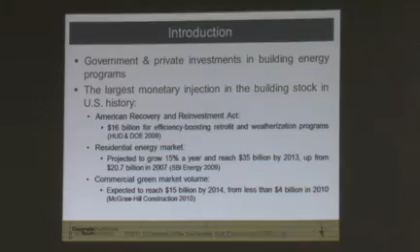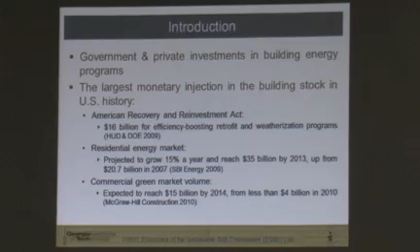Here is an overview, and let me get to the bottom of it. Everybody in the construction industry, in architecture, engineering, construction, talks about sustainability and a huge amount of investment from the public sector and private sector into sustainability, renewable energy, and things of that kind that help us save energy, produce energy on site, and it's large, it's huge. If you put some dollar values, you can see it's huge and it's rising.

It's already up there. And the major problem from the practical side is this valuation is not addressed correctly. Most of our valuation techniques are based on return on investment, payback period, or net present value, which really don't capture some of the fundamental features of these investments. And I'm getting to that. And one of the most important limitations here is most of them assume that you have a fixed business strategy, fixed investment, and you have to value that fixed investment. In other words, that you have a fixed design, fixed strategy for design and construction, which cannot be changed, or you cannot incorporate it in multiple phases.

And the reality is not like that. Usually this investment happens over time in multiple stages, and we can capture several investment strategies that are flexible, can incorporate some flexible design technologies to enhance the value of investment, to minimize exposure to financial risk. And what I'm proposing here is a new valuation method to overcome the limitation of current valuation techniques.

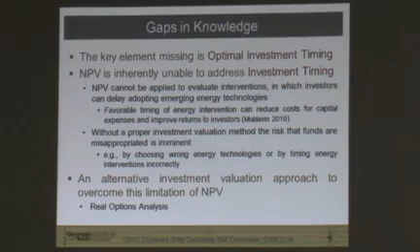So the gap is that investment timing. Currently, that investment timing is not part of the equation. So it's not just investing today or never. It's about when would be the optimal time to invest, and what would be the investor risk profile under all sorts of uncertainty, considering that optimal time for investment.

So basically, I'm proposing, instead of using conventional methods like net present value, the basic engineering economy that some of you might be familiar with, using option theory, because these are really options for investment. You can exercise it as an owner, as a property manager. You can exercise it at any point in the life cycle of a building. It's not just immediate investment. And you're looking for enhancing the monetary value and minimizing the risk profile of that investor over the life cycle of the building.

Let me talk a little bit about the flexibility, and here is something that I would like to hear back from you in the Q&A section. I would like to see a good example, a good flexible design strategy, not just for sustainability. It could be flexible workspace, it could be a flexible AC system. The thing is, what can this flexibility bring to the table?

And the example I have here is solar ready. I mean solar technologies, photovoltaic panels. In the past decade, the price dramatically dropped. But many homes, many buildings cannot use that because it requires some additional costs. It's not just purchasing those panels. It requires wiring. If you want to use it for heating water, you need to do some piping, and you need to have additional structural support to put the PV panels up on the roof.

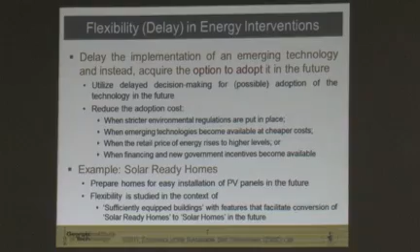So that's kind of challenging the conventional wisdom in terms of fixed design. So we'd like to have flexible design in order to help us achieve sustainability in the future at lower cost and higher expected value in terms of monetary value and benefits for the owner. There are a lot of barriers for energy efficiency and renewable energy. I listed 20 factors here.

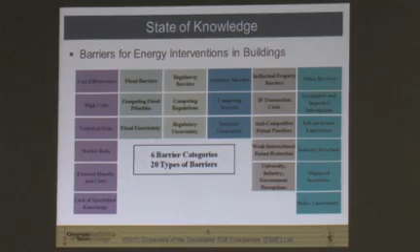What I'm mainly focused on here is cost effectiveness and the fiscal barrier. What I'm saying is, at the end of the day, for whatever value system you have, it should make economic sense, and how we can make a business case for sustainability. And what I'm arguing is that flexible technologies like solar ready can help the owner achieve a higher level of investment value.

Again, this is an overview of conventional metrics like ROI and payback period, and the limitation is they don't consider timing. And that timing sometimes ends up in overinvestment, sometimes underinvestment. So that timing is really key. If we want to achieve certain environmental goals in terms of energy reduction, we need to not waste capital. That capital is limited. A smart investment helps us achieve better utilization of the existing, limited capital.

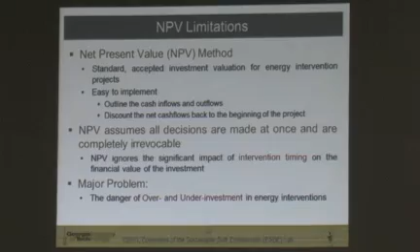Real options can consider investment under uncertainty and also consider timing as part of that. That's what I'm going to use and apply to the problem at hand. Here is an overview of the research method. For any economic analysis, we need to have some sort of life cycle cost and benefit analysis. So we need to have some idea about what would happen on the energy saving side, in this case renewable energy production coming from the photovoltaic panels, and what would happen to the installation cost, the initial cost.

The initial cost tends to drop rapidly. It kind of follows the experience curve. For most technologies, it's covered by the learning by doing effect and economies of scale. So we have that declining cost. But on the other hand, we have so much uncertainty about the actual performance of these emerging technologies, in this case the solar PV panels. And by the way, they degrade over time, so their efficiency decreases over time, and we have some uncertainty in that regard as well.

On the other hand, the utility market is volatile. It's very volatile because of the energy market in general. If you look at the price of oil and other sectors of energy, you see that volatility somehow translates into the electricity market that we all use at homes and businesses. So that volatility is part of the investment.

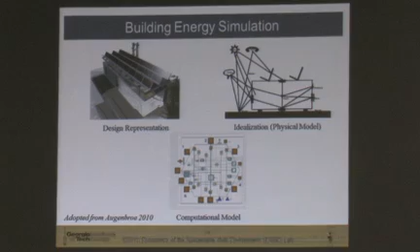We have good methods and good models now that can help us quantify uncertainty about energy savings. We can run uncertainty quantification on building energy simulation. So we have some ideas about how the energy saving looks like over the life cycle of a building. That's important because it helps us say, if I adopt it today, how much am I getting in terms of energy saving, and how does my energy saving profile change over time. This is something we can benefit from.

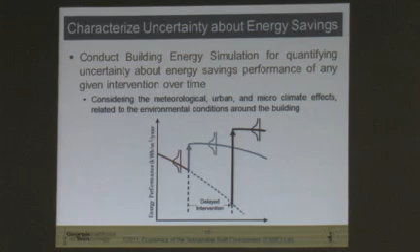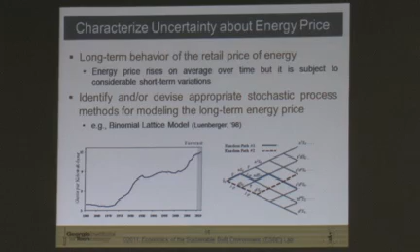In our framework, we use that as one component. On the other hand, we need some sort of stochastic model, some sort of uncertainty quantification over time to capture the monetary value of that energy saving - what utility companies would pay you, or what you have to pay them to get that amount of energy. So the combination of the two gives me the energy saving benefits of any technology, in this case, renewable energy.

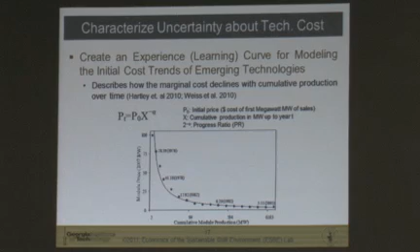But there is still uncertainty about how much they actually perform in actual settings in different climates. So that should be taken into consideration. With the building energy simulation domain, we can capture that as well. Then we run that trade-off analysis.

While you are waiting to adopt the technology, you're losing money - that's the opportunity cost right there. So the trade-off is accumulated energy saving that you're not getting by adopting early, versus installation cost that drops over time. At some point these two cross out, and that gives you immediate decision rules for investment. It might be that today, for many technologies, things are mature and there's less uncertainty about their performance, so you have to adopt it today. Otherwise, the opportunity cost is high.

You're losing money by delaying your investment in energy efficiency. For some other technologies, you would still like to observe the market - not just the PV market, but the energy market and regulatory changes that impact energy price. So you will still like to observe what happened in the market and delay your investment, but you need to be equipped for that.

Like for instance, for solar ready, as you do your stuff, you have your structural system supported and additional support for putting PV on the roof. You also have wiring done in your attic if it's your home. Because these are going to be huge costs.

On average, if you want to turn your home solar ready when it wasn't designed that way, that costs you around 15 to 20,000. But with some consideration in early design, early construction, it might cost you maybe less than 1,000 to do extra wiring, extra pipe in the attic, and put some sort of structural support for PV. That gives you a lot of savings and a lot of incentive to adopt these emerging technologies in the future - it might be down the road 10, 15 years.

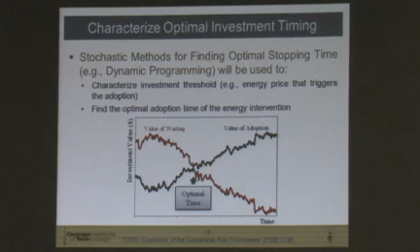What I'd like to say is we need to have some of these flexible design strategies as part of the building design mentality. It's not for today, it's for use over the life cycle of that building, that home. And with that consideration, I have one example. I welcome other opportunities, other technologies that you think would have benefit and are still emerging, but in the future we can adopt and incorporate into a flexible design strategy.

Then we're going to compare these two - basically compare what is fixed, going today, versus delaying that to find optimal and favorable timing. You see a difference between the investor's risk profile. In other words, you minimize exposure to negative outcomes because you delay investment - if the situation becomes unfavorable, you don't have to invest - versus the case that is fixed, where you have to go in today.

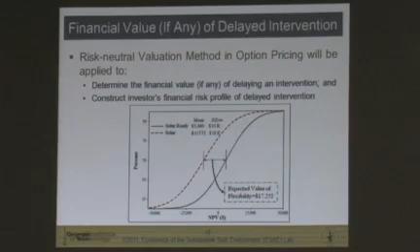We had an example of a solar-ready house, and we compared it with the actual solar house. It's kind of a California example. These are the overview of that case.

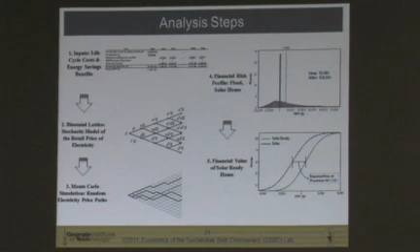We built that electricity profile model. We built that energy saving calculation in terms of some uncertainty about the actual performance of these PV panels over time. So we get to an optimal threshold for investment.

In this case, we consider one variable. If you look at the electricity price over a period of 20 years, you see this threshold for investment. That means investors would find this area waiting more favorable. Why? Because it's early, things are emerging, and there's a value for waiting. The opportunity cost is not huge, so you wait.

But at some point it flattens out, meaning this is the time. It also considers not losing money, the energy saving benefits you would get if you implement that correctly at an appropriate time.

So as you can see, in most cases, if you look across the nation at electricity utility rates from retailers, most of them are here. They're still waiting to see what would happen. And if you look at places that already adopted, they're talking about this kind of utility rates.

Out west, if you check the utility rates in California and compare them to Georgia, you'd see why it's not making economic sense here. So I'm explaining the motivation when I started this, why certain technology adopted faster in Europe, California, out west, and the northeast compared to the south, Texas, or other areas.

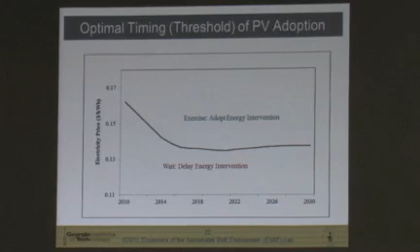Owners push it, but investors have to be behind that too. So if it's not making economic sense, if we're talking about a few cents per kilowatt hour, we're just not getting there. That's the bottom line from the economic standpoint of sustainability.

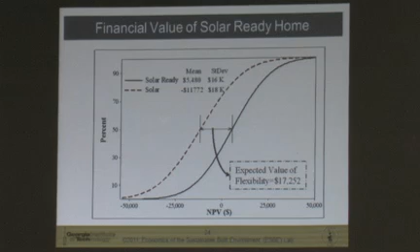We can find out the profile of adoption when it becomes optimal, as well as the risk profile of that. This is basically the probability of getting financial value. You can see in this particular case, by delaying it a little bit, you get some flexibility and a better risk profile in terms of financial value for that investment.

So to summarize: it should not be about just fixing a strategy for design, particularly when it comes to emerging things like sustainability and energy efficiency.

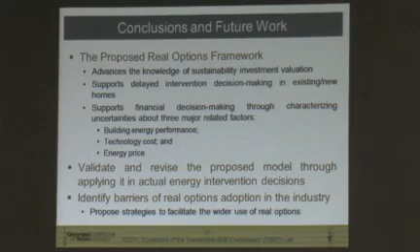I would like to talk to you. Please come to me if you have ideas that could be applied at the level of city and regional planning, flexibility for sustainable neighborhoods, or at the level of a building or home. Thank you so much.

Hi, good morning everyone. I'm Javier Irizarry, assistant professor in the School of Building Construction. The work we've been working on, partly funded by the GTF grant, is looking at a situation awareness approach to architecture, engineering, construction, and facility management decision support system design.

So I'd like to tell you about this project, why we chose the facility management area as a testbed. I'll explain the concept of situation awareness and some of the areas this concept has been applied.

Then I'll tell you a bit about applying the concept of situation awareness to the area of facility management. I'll tell you what methodology we used, the goal-directed task analysis, what that entails, and what we did to apply that method to facility management in our study.

I'll briefly go over some of the results, some conclusions of this part of the study, and what the next steps are and what we're working on next.

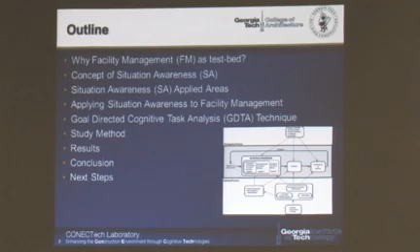So why we chose facility management as a testbed: we realized that facility managers work in a very complex and dynamic environment. Buildings are like living creatures that have to be taken care of from their conception through their decommissioning. It's a very dynamic environment with a lot of problems.

The facility manager, as we see the profession, should be capable of having an accurate mental picture of the environment and all the challenges they have to face. They need to be able to understand all the goals that entail their job in order to come up with the most acceptable decisions for maintaining the facility.

We also believe that situation awareness can help these professionals understand what their specific information needs are and how to better address decisions using the required information.

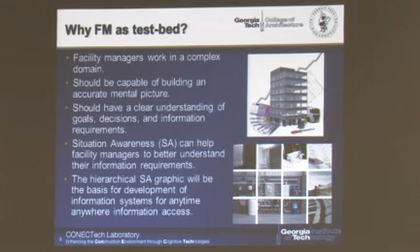The outcome of the process of applying situation awareness to this profession is a hierarchical situation awareness graphic that will give the developers of future systems an idea about how to better provide information to the people that need to make decisions in this field.

So with that, I'll briefly introduce the concept of situation awareness. This is something that comes from the human factors domain and has to do with how people cognitively process information and basically make decisions. Think of it as an engine that drives the decision-making performance of the user of that information in very complex and dynamic environments.

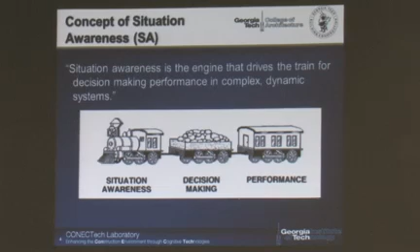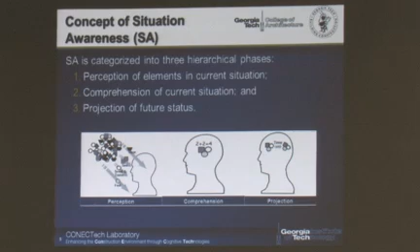There are three hierarchical phases to this process. The first is where the person or user has to perceive the information or elements of the situation around them. Then they have to comprehend, basically make sense of that information and process it in their minds. Then they have to project what the outcomes or results of their decisions will be into the future. So it's a cognitive process that goes through those three steps.

So where has this been applied before, and why did we become interested in this method to apply it to AEC plus FM, starting with facility management?

This is a concept that has been applied in the military. Think about military operations where you have different war fighters, if you will, and they receive a lot of different information that they have to process in order to make decisions on where to take supplies, where to take strike forces, etc. So that's one of those areas.

The second is aviation, where the main goal of the pilot is to basically take off and land safely. They receive all this information from traffic control, their navigation charts, and they have to process all that information in order to navigate from point A to B and do that in a safe manner.

And in healthcare, it has also been used to make sure that, for example, nurses and doctors communicate the right information at the right time to avoid costly mistakes, such as giving someone a drug they were not supposed to get. So that is the motivation to use this, mainly from the military application.

We think that the AEC-FM field is kind of like a war. It's a war against cost, against time, against failure rates of equipment in buildings. So we have to basically manage all the resources that we can to accomplish the goals of the mission, which are to construct facilities on time, on budget, and maintain them at the lowest cost possible while providing the best environment for users.

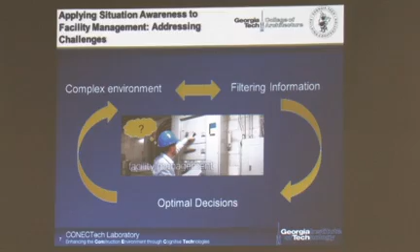In facility management, we thought about addressing those challenges recognizing that it's a very complex environment with a lot of information that the facility manager has to process to make decisions on equipment replacement, equipment purchases, and other things, and then reach the optimal decisions that will achieve the goals of their mission.

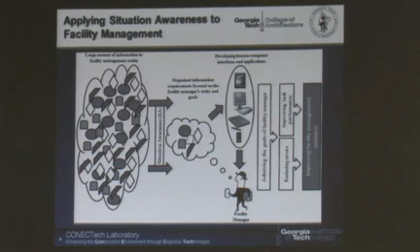But we don't clearly understand all the pieces of information that they'll have to process, or what types of decisions they have to make. So for that, we are applying this method in order to provide facility managers with a filter that would give them the right information at the right time, taking advantage of technology in order to make appropriate decisions.

So the method we use is called the goal-directed cognitive task analysis, developed by Endsley. It has four steps: the first is that we have to identify the key decision makers in the facility management environment.

That is the facility manager. Then we have to identify the major goals and associated sub-goals for that person. Then identify the primary decisions needed to accomplish each of those sub-goals that will contribute to the main goal. And then identify the situational awareness information requirements that the user will need in order to make those decisions.

So what we did is a structured interview. There were one-on-one interviews with five facility managers in the Atlanta metropolitan area. Those are considered subject matter experts because of their experience and level of knowledge in the area.

They were about an hour-long conversations, and the result of those conversations are called the hierarchy charts. The hierarchy charts are basically flow charts that describe what the main goal of the position, or in this case the facility manager role, is, and then all the sub-goals that would help them accomplish the mission of the main goal, and then all the pieces of information that contribute to those sub-goals.

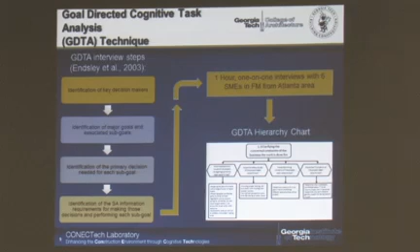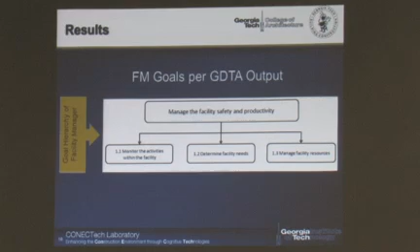So talking a little bit about the results, we found that the main goal for the facility manager, summarized here, is to manage the facility with safety and productivity in mind. Safety for the users and productivity for the users, but also productivity of the resources that are employed. And then there's all these other sub-goals, like monitoring activities within the facility, determining the facility needs, managing facility resources, and below that we would find all the pieces of information that would contribute to them being able to make those decisions.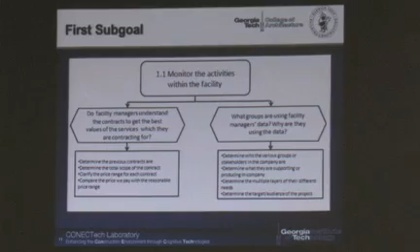So this is the process. In conclusion of this stage of the research, we find that situation awareness and its application to the facility management field has the potential to enhance ambient awareness, or being aware of the critical pieces of information they'll need to get a hold of to make the appropriate decisions. If they know what the key goals of their position are and apply those situation awareness concepts, they'll be able to make those decisions efficiently.

And the last point is that this methodology is appropriate to develop human-computer interfaces that will allow facility managers to access the information they need to make those important decisions.

So what are the next steps? Currently, we're working on a project called InfoSPOT. What we're doing is looking at the application of augmented reality for accessing building information that would help enhance the situation awareness of facility managers.

It's a low-cost, complete augmented reality solution, self-contained in a mobile device, and we brought an example of the prototype we're working on. It's a mobile application that will track the user's position, and the user will be able to, through augmented reality, look at information in their environment about the different objects included. We're doing it at this point with surveyed observation points, or SOPs, where the user would have to stand in order to geolocate themselves in reference to everything else in the space.

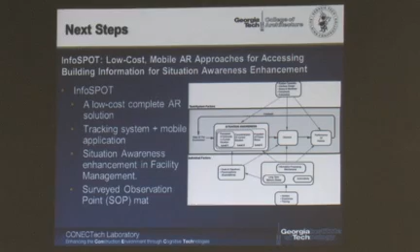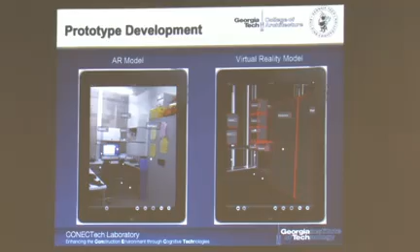So this is what one version of it looks like, and this is a virtual reality model version, which the facility manager can use from any room in the facility, and basically by panning around, he will look at all the information or all the objects included in that space, and by touching one of those objects, the information about the object will come up.

So the information provided to the facility manager through this interface comes from the results of applying the goal-directed task analysis and the situation awareness approach to develop this interface and the information provided by the application. And with that, I thank you very much for your attention.

As Leslie mentioned, my research is in digital design and fabrication, especially in the area of parametric surfaces and digital places. These two research agendas are synthesized in architectural projects, and that's what architecture is always trying to synthesize. And as an architect, of course, I'm interested in projects as well.

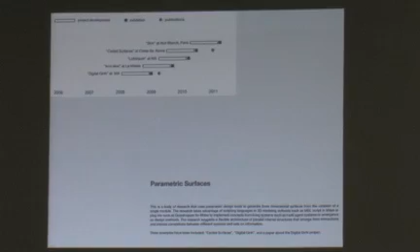Within the research agenda of parametric surfaces, you can see a series of research projects, and Lichtraum, that specific research project, is part of that agenda. And digital places, there's a series of projects too, which are usually manifested in gallery installations or exhibitions.

These research areas are then synthesized in projects, which are in most cases competitions. So you see a series of competitions over the last years, and these projects then inform sometimes publications, which you can see with the little blue dots. And sometimes also some of these competitions are winning entries, and also built entries.

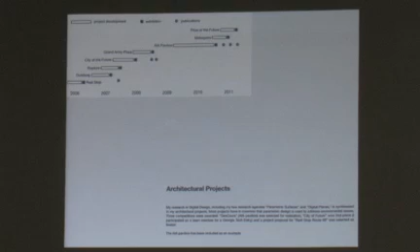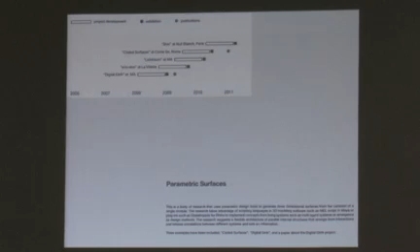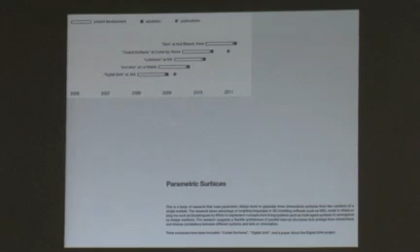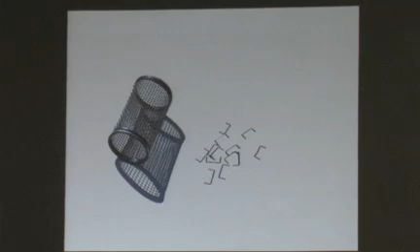The main interest in the research of parametric surfaces, there are four main themes that always carry through. The first is an interest in modular systems, and what you see here is a partition, one of my first projects fifteen years ago, made out of hair rollers. It's for a hairdresser, so it's hair rollers stapled together. It's my idea of sustainability, that you can feed every material into endless industrial cycles. That's very unusual in architecture, if you think about it.

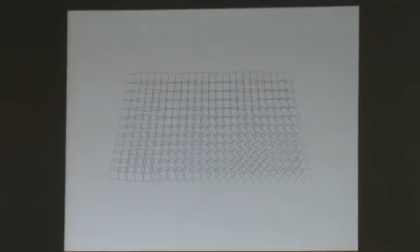The second is an idea of variation. What we saw in the last years is that we moved from this image I created from a square, and then the square is animated. So the variation comes through animation. But in recent years we use scripting and coding, and this pattern was generated in Grasshopper.

What's interesting is that if you consistently apply rules in different ways, you can actually generate form. So it's like wave structures—not just an overall form that's then populated, but a form that emerges from a consistent application of a set of rules. I didn't write any paper at that time, I was just graduating from school, but I really liked experimenting with scripting. The third interest is in the material of plastics, and I think plastics is a material of the future.

What you can see at the moment is that the chemical industry is changing from fuel-based plastics—and that's why we didn't like plastics in recent years, because it's not environmentally friendly—to bioplastics. There's a whole new palette of materials available which the industry doesn't really know what to do with, which come from recycled materials and also from biologically fabricated materials.

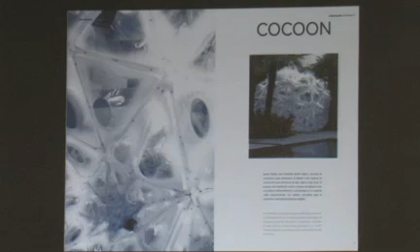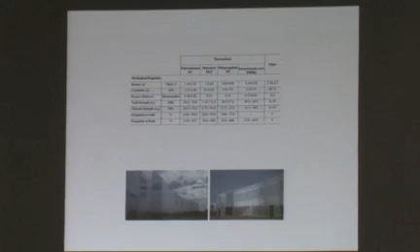And if you look at the properties of different plastics and compare them with existing building materials such as glass, it becomes obvious that it's definitely an alternative and an interesting material to look at.

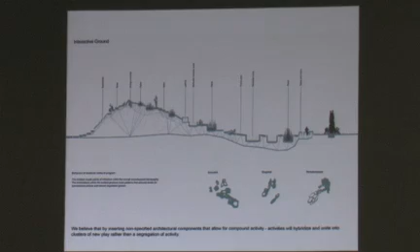And the fourth interest is the hybridization of building systems. What you can see is a modular-based system, used to create an envelope, a cover for a park, basically. Or in relation to that specific project, Lichtraum, it could also be used to create surfaces that are sometimes more open and sometimes more closed.

Lichtraum is a project that is a self-supporting solar screen that is designed to maximize visual comfort. So there's two big challenges. One is to build a self-supporting structure, a self-supporting screen, and the second one is how do you reinvent a daylighting system?

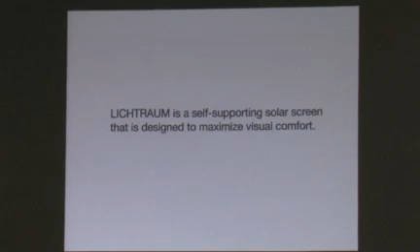If you want to invent a daylighting system, the first thing I did is I looked at every kind of possible daylighting system that is out there. For example, prismatic divisions, optical divisions, overhangs, light shelves, fins, baffles, Venetian blinds, louvers, brise-soleils, shutters, and so on. There's a whole range of existing daylighting systems. And then it is important to understand the behavior of these different systems.

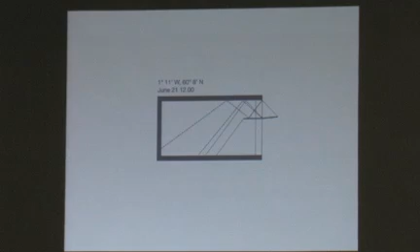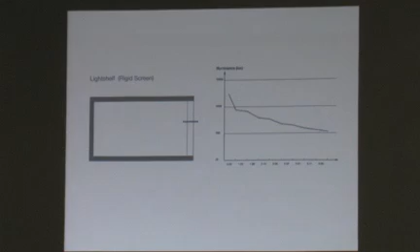So what you can see with the light shelf, for example, you have a horrible condition if you sit right next to the window because you have glare, so it's above the comfort zone. But you have a very good performance if you want to project light very deep into the space, versus a louver system, where you have very good performance close to the window. But it becomes horrible if you go deep into the space, and then you lose the light necessary.

If you know the behavior of different systems, you can then start thinking of connecting and combining them and creating hybrid systems. So that's what I was speculating with a model that I had earlier, which is basically a system that is built from cones, and the hypothesis is that if I can fold a cone in different ways, I can actually use it to reflect light into a space.

What we did here, also with the help of our PhD students, is to model that system in the computer and then simulate it in Ecotect and in Radiance. This blue area that you see here is basically generated from 100 different variations of these lighting cones. You can see the variation is sometimes compressing the screen, tilting it, or scaling it differently.

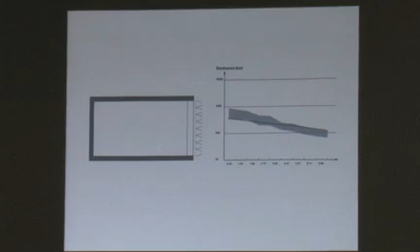So the goal is to look at the advantages of the different systems and to try to flatten this curve to get a good performance close to the window and deep into the space. If you have a screen which is a variation, the question is how do you generate the variation? There are three variables within the system, and this is a section through this cone. One is to fold the system, the second one is to tilt the system, and the third one is to scale it.

The next challenge, and that becomes really the architectural challenge, is how do you construct it, how do you build it, and how do you detail such a system. In that small model, it is very easy to connect. It's still a clever detail because it doesn't use any other kind of material to connect. It just has these flanges which fold into each other. But it would not work, of course, at a larger scale.

To look at it at a much larger scale, we use different techniques to build it rather than folding it. We use a combination of vacuum forming and drape forming plastic. So you can heat the plastic and put it in a final shape. And the way it is connected, it just sits on top of each other, with bolt connections, which creates a problem because it creates hinges basically. So you have a kind of flexible system, which is not entirely stable.

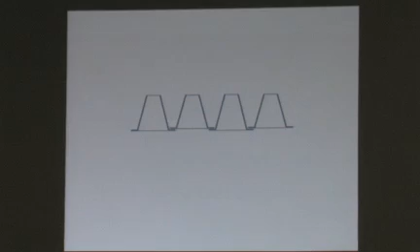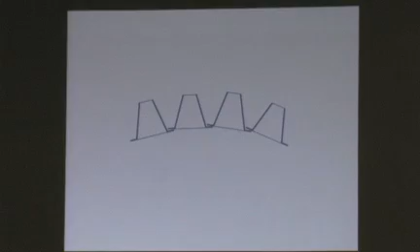What is interesting is if you add form, change the complexity of form and add curvature to it, then you create a tension within these connection points, and you can actually build extremely lightweight structures. And that's an image I took from the AIA Pavilion in New Orleans.

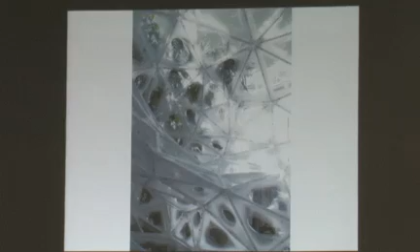Another technique is that you build it in a very similar way to the small model. Rather than having these tabs, you would just create bolt connections, but connections the other way. This is actually very interesting structurally, because if you use a material that has a memory built into it, like specific high density polymers, you can fold that material, you can soft fold it.

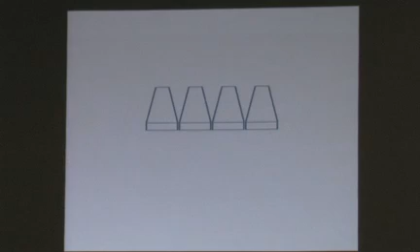If you cold bend the material, you would destroy the internal quality, the internal structure of the material. But if you don't destroy the internal structure and just bend it, the material would keep the memory and would try to fold back. So if you create this in a sequence, you build a tension into the surface, which is interesting structurally, of course. You can do this in one direction, but you can also do this in two directions

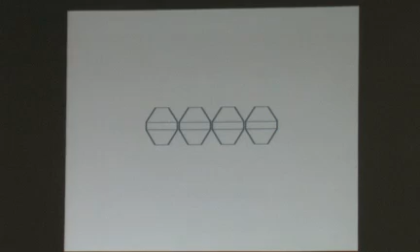to create different depths. And you can then fold this in different ways, completely compress it, for example, which we did for a pavilion which was finished in October in Paris for the Nuit Blanche Art Festival. And I just got a letter from the Cultural Ministry in Paris saying thank you for a great project, which is very nice.

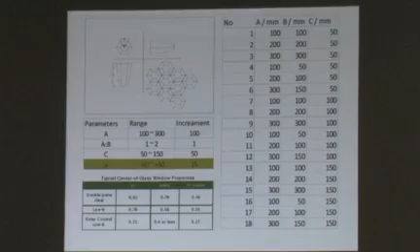Of course, these are nice diagrams to communicate the project, but behind this there's a lot of work that I did together with Yumin Su, a PhD student with Fried Augenbroe, and GTA students that helped me create a lot of different simulations. On the top left we have the cone with the different measurements. And on the right you can see a list of all possible dimensions, running every possible scenario and variation, and seeing how this would perform.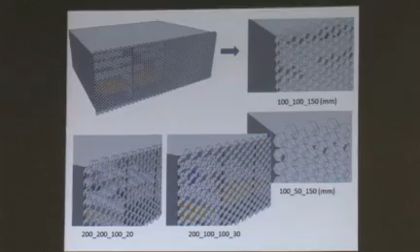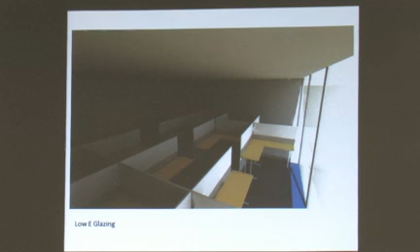So you can see an image in Radiance. You create tons of these diagrams, different study models, different models. You need to rebuild these models in Ecotect in order to build the simulation, which is very time consuming. Creating these curves, but in Radiance you can also render an outcome that gives you a very good idea of how the lighting quality within this space would really be in reality.

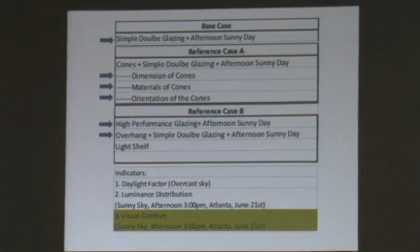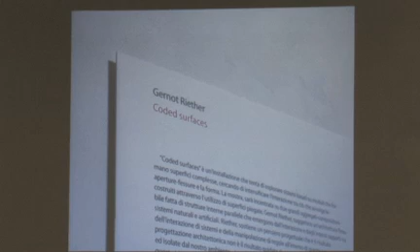And of course there are still issues. In the middle you can see the material finish. We are still in the process of running different simulations looking at different finishes of the material. A larger aggregate of the project has been built in two galleries now, one in Berlin and one in an architectural gallery, Comessé, in Rome.

And this is how I traveled with a small model. There was a smaller aggregate in Berlin. It's my famous suitcase with hundreds of modules spread out on the floor, and then connecting all of these different modules into a small aggregate exhibited in Berlin.

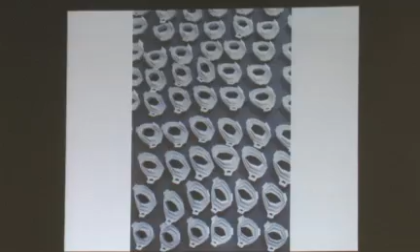And then I changed the size of the module, much larger, used the same detailing, and introduced all possible variations: the size, the orientation, and the scale. Here you can see me connecting it. It took me a week to connect 2,000 pieces.

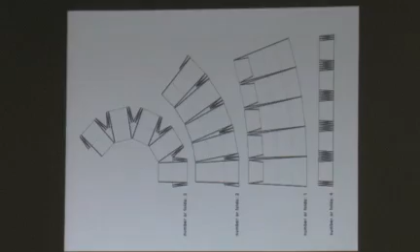And you see from the bottom and from the top, and it's the entire exhibition with the large piece and smaller study models, and all 11 possible ways of folding the module. What's interesting is if you fold it, it also informs curvature based on the folding technique, the different orientation, and the effects it would generate, the sizes.

So it's all different pieces that all had to be numbered and logistically organized in order to assemble it. And the script, which basically combines all of these three different parameters in one system. And if you run the script, you get something like that, and constructed it looks like that. And here you can see detail shots where you can see the different sizes and proportions of these modules. So they're really all different. It's not just a perspective effect.

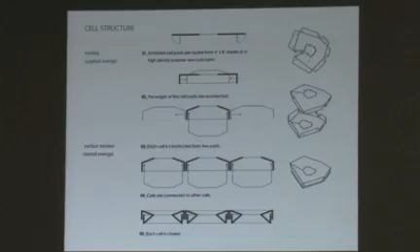And so if you look really close, you can see some are more stretched, some are smaller, some are larger. And the next step is to increase the size of this. So what you can see on the right is CNC templates. It was 60 large sheets that were CNC'd in our digital fabrication lab. And this is the assembly process and building a larger pavilion. That was the same pavilion that I showed previously in Paris.

What you can see on the right is Sabri Gokmen, who is a PhD student with Lars Spuybroek, who flew into Paris to help me with the project. It would be impossible to do that all completely alone. This is a projection you can barely see from the artist Damien Valero in that pavilion in Paris a couple of weeks ago. And a piece of the pavilion was also exhibited in September in the Paris Fashion Week. And so there's also an interesting dialogue, not just architecture, but also a relationship to fashion, which is totally coincidence. Thank you.